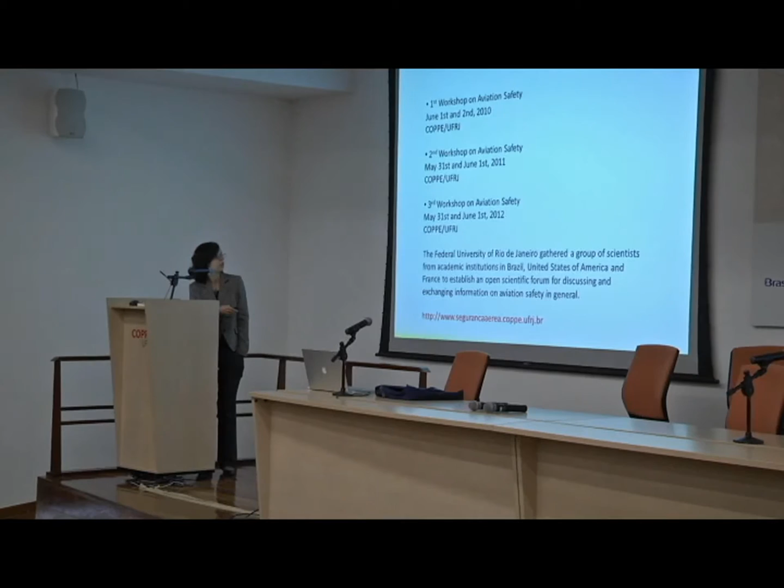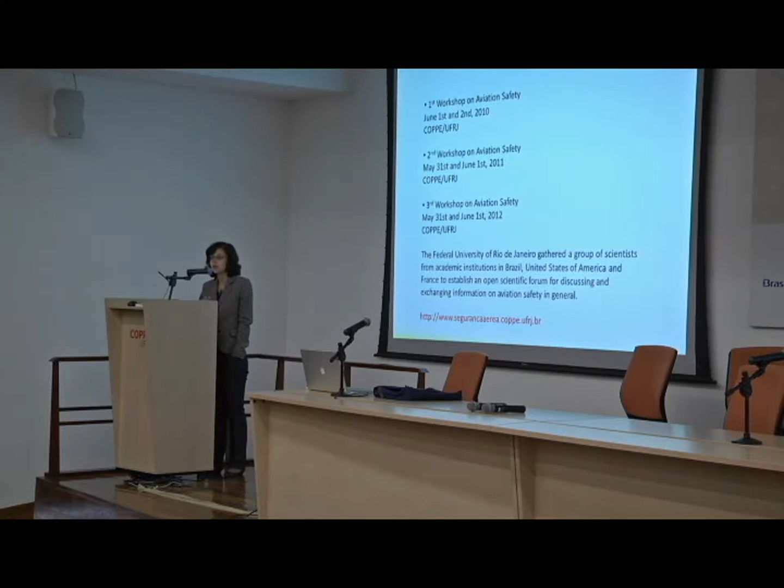To give a brief historical perspective, in the morning we mentioned the previous seminars regarding aviation safety. The idea of the wind tunnel was brought up between the first and second workshops of aviation safety, which came together through a group of scientists from Brazil, United States, and France. Professor Sheriff and Professor Bob were here at the first workshop, and the ideas that came up in those two events resulted in the wind tunnel.

So I was going to say, Bob, don't worry, your email account was not intercepted by the National Security Agency. This message came to me from Professor Attila, and I apologize for bringing up a personal email, but it's just to contextualize the idea of building an icing wind tunnel here at COPPE. This email was sent by Professor Bob to Renato, and here he mentions it would be a good idea to build an icing wind tunnel in Rio, allowing us to do serious research on icing problems related to the aeronautical industry.

Just to stress some points—Bob gave us all the clues. It was a good idea to build an icing wind tunnel.

An icing wind tunnel need not be big. Space is one of our crucial limitations—our current lab is almost full, and the next one will be full in some years too. So we didn't have too much space, but he explains that since the pitot tube is small, flow blockage is not a problem in a small wind tunnel. Since the pitot tube is small, the tunnel could be small too. The icing wind tunnel would be perfect for research on conventional pitot tubes, and also on new technologies or sensors for velocity measurements that are less prone to icing problems.

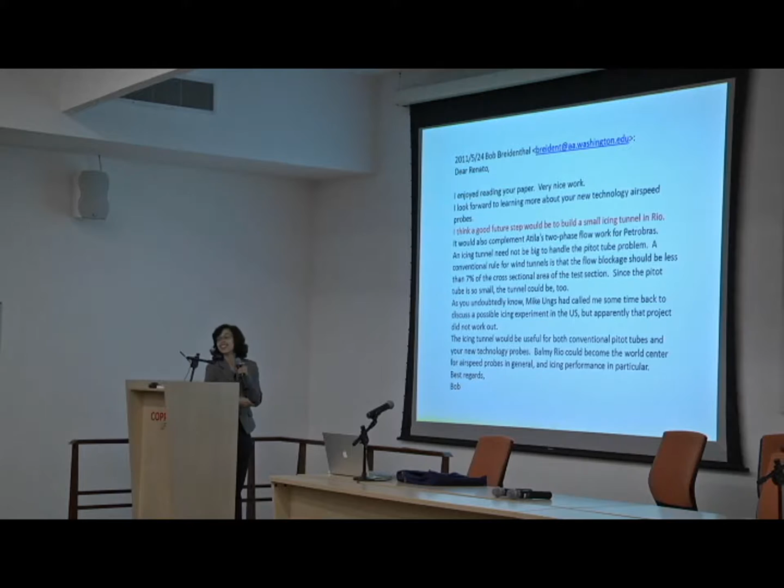So we got this idea, and Attila—who is also a crazy person and always says he has nothing to do—sent Bob's email to me saying, we are going to build a new wind tunnel.

So okay, we started planning that, and FAPERJ, our scientific foundation of Rio de Janeiro, opened a scientific call in September 2011. If you check, this email was sent in May, and by September we already had a sketch of the wind tunnel—a very basic sketch, but it resulted almost exactly in the real wind tunnel we have today.

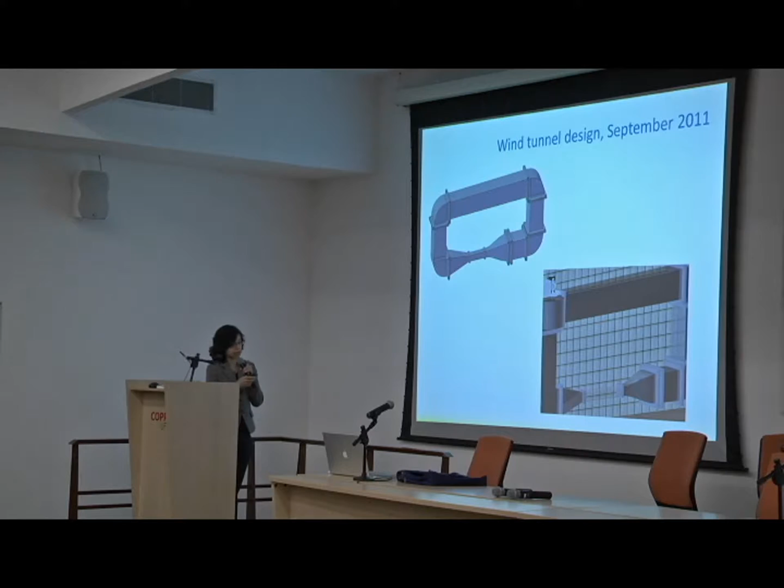I'll explain this in detail, but just to give an idea of the time schedule: we sent a proposal to FAPERJ in September 2011, and a place to receive the wind tunnel was selected in November 2011.

The building next door that you just visited looked like that in November 2011. The boats are still there, but now we also have the wind tunnel operating.

Then in August 2013, we had a big part of the wind tunnel already made, built with stainless steel tubes. We already had the test section in place, and here we can see the other wind tunnels over there, with the condensers and other components being installed.

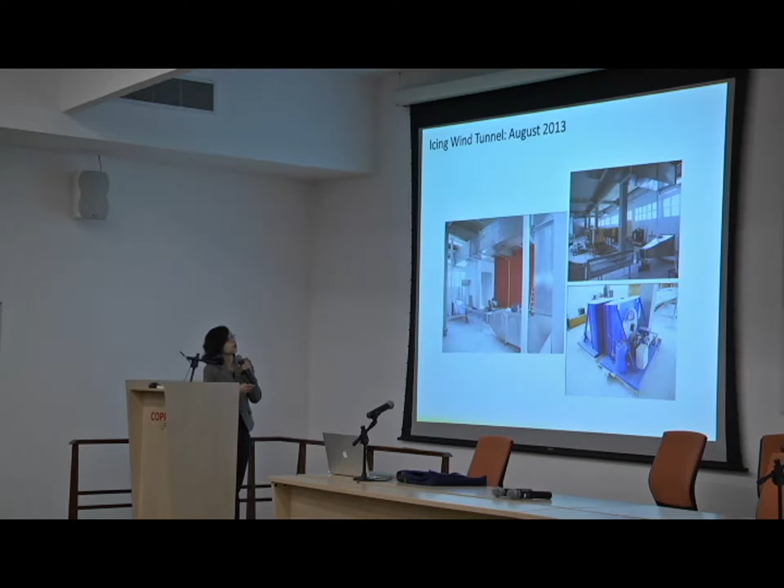Then in May 2014, in the beginning of this week, the place we just visited looked like that. We were crazy about the schedule because we wanted to make everything ready for this workshop—the date was very important for us, and everything needed to be ready in time.

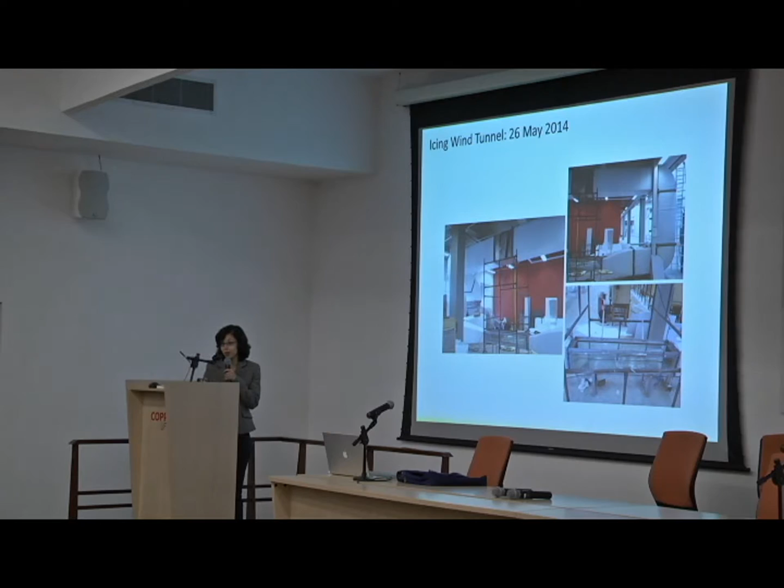This was real teamwork—when everybody involved wants to make it happen, we can make it happen. In two days' time, everything was working, and we managed to turn on the wind tunnel yesterday. As Professor Cota mentioned, Murphy's Law was not valid this time, and we could turn on the wind tunnel, the fan, the cooling system, and we even managed to generate ice in our wind tunnel.

We have the pitot tube installed over there, and this picture was taken at 8 p.m. when the experiments were done. Everything came together, and we were very happy because it all worked as we planned.

Coming back to the initial concept of the wind tunnel, since space was an issue, we planned to build a closed wind tunnel distributed vertically, with the fan located on the upper side. So we would let the flow develop.

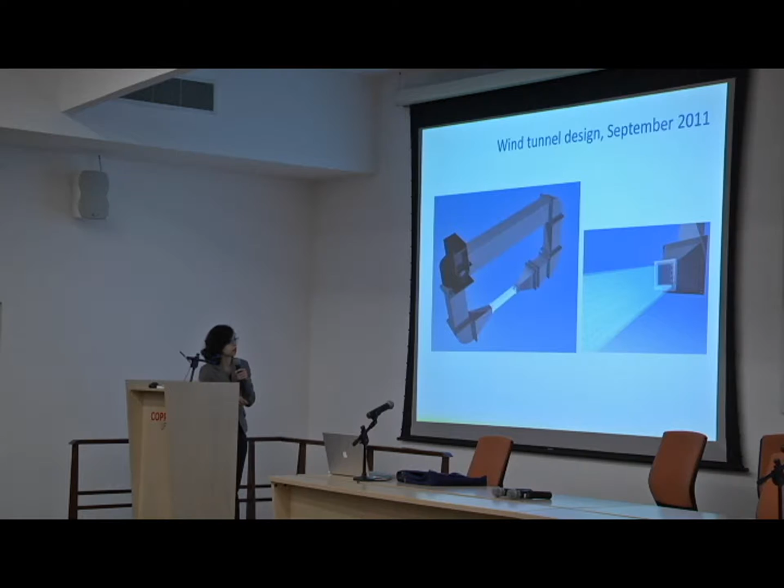Here would be placed the cooling system, and then we have directing vanes, the honeycomb, contraction, and the test section. Here we have the details: the fan, the heat exchanger, and the spray bars to generate the particles.

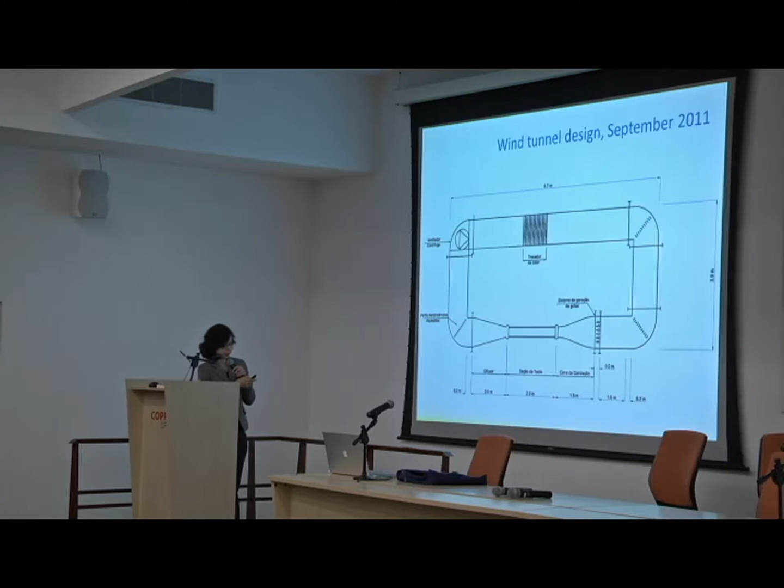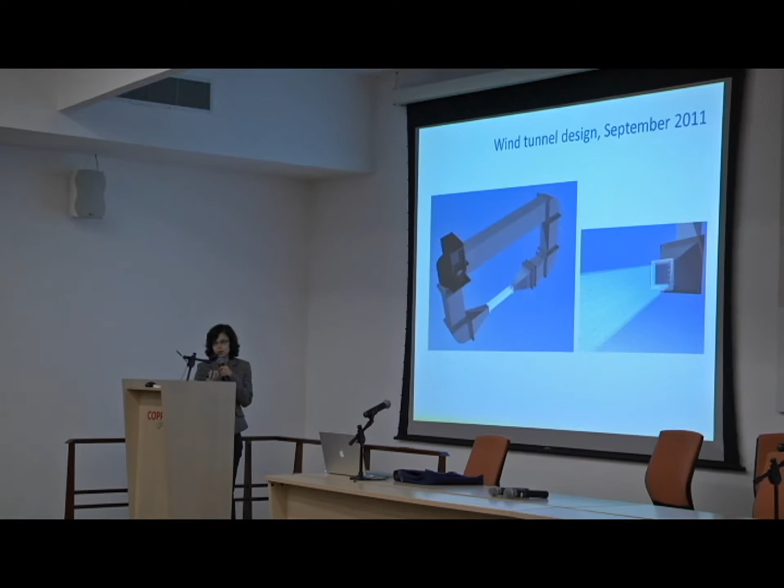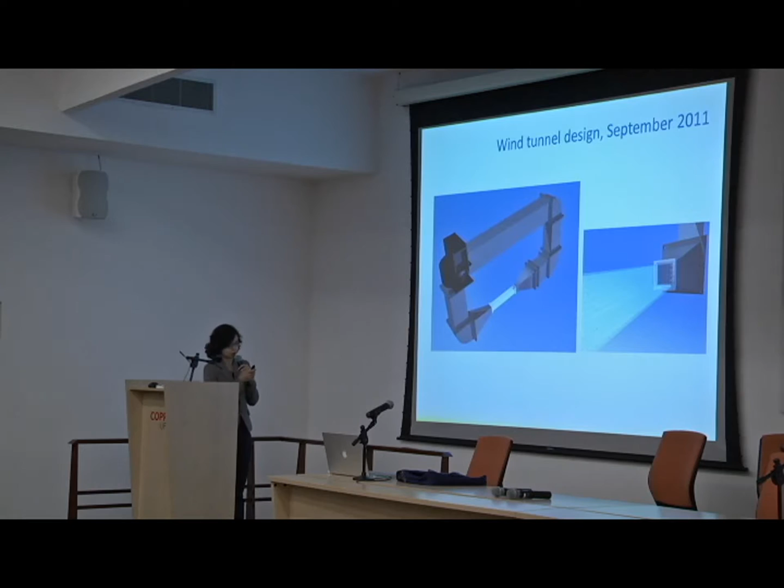This configuration had a small problem because of the fan. In this configuration, we had to let the axis be vertical, and this had some mechanical problems that the company that would provide us the fan would not like to resolve. So we simplified the problem and relocated the fan.

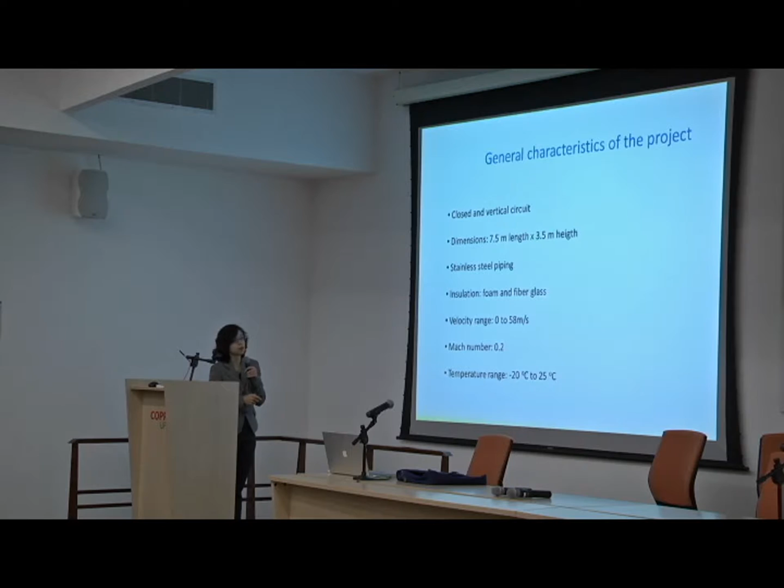I will show you how we got to the final version. Our basic idea was to build a closed and vertical wind tunnel. Since space was an issue again, we had that first figure I showed with the boat - that was the place we had to fit the wind tunnel. So it should have 7.5 meters in length and 3.5 meters in height.

It would be made of stainless steel to resist the water and the droplets we would insert, and we would like to reach 58 meters per second, or Mach about 0.2. I didn't put the Reynolds number.

I agree that Reynolds number is a critical number, but it's not a well-defined number here - we could define it based on the height of our sensor or on the diameter of our sensor, so that's why I didn't include it. In terms of temperature range, we would like to reach minus 20 degrees, and it will certainly go this far.

So in the final configuration, we managed to get it a bit larger, bigger in length than we first planned. The cross-section of the main wind tunnel is 0.8 by 0.8 - the bigger the section, the lower the drag we have, so the lower the pressure drop we impose on the fan. That's why we chose those numbers, which also allowed us to have a contraction ratio of 7:1. I'll show you later.

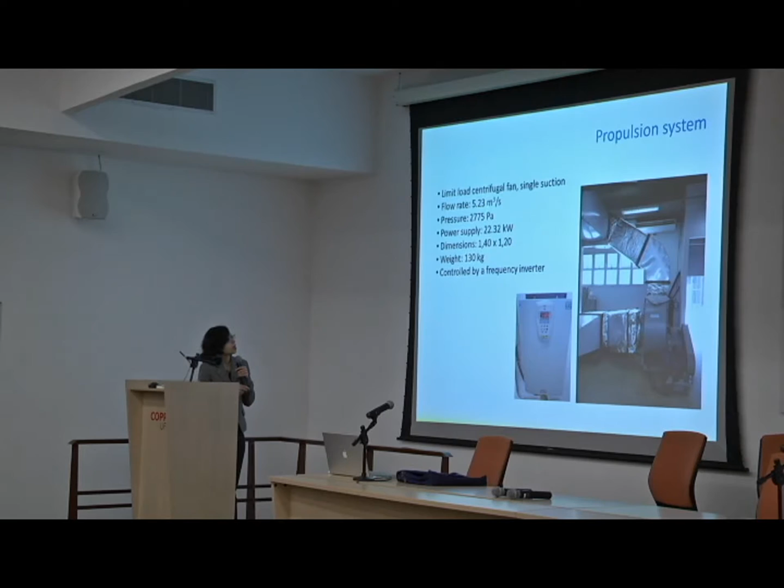So we specified a fan that could provide us Mach 0.2 - we actually went the other way around. We checked how much pressure the fan could provide, and then specified the honeycomb and quantified all the pressure drop in the system.

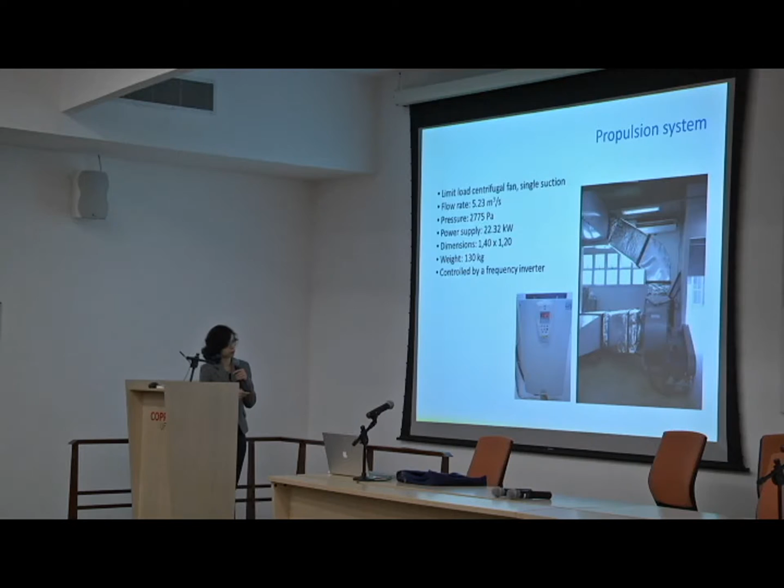José Roberto did all those calculations, and this is actually part of his PhD. So the fan has these dimensions, this weight, and this power in the end, and we can vary the velocity in the wind tunnel by a frequency inverter, changing the rotation of the fan.

So for the cooling and heating system, the idea was - we did all the calculations of how much heat we would have to extract from the flow and from the water droplets we insert in the wind tunnel. Summing up all the terms we had to exchange, we came up to this number.

So the evaporator unit has this capacity in order to provide minus 20 degrees Celsius for that test section. The working fluid is this refrigerant fluid, and the two condenser units are positioned on top of the lab.

And it was a huge operation to take the condenser units to the top, because they weigh a lot and have this power each. So we are operating now with just one, but they can be used in parallel, so they can both be turned on in order to provide a lower temperature on the test section.

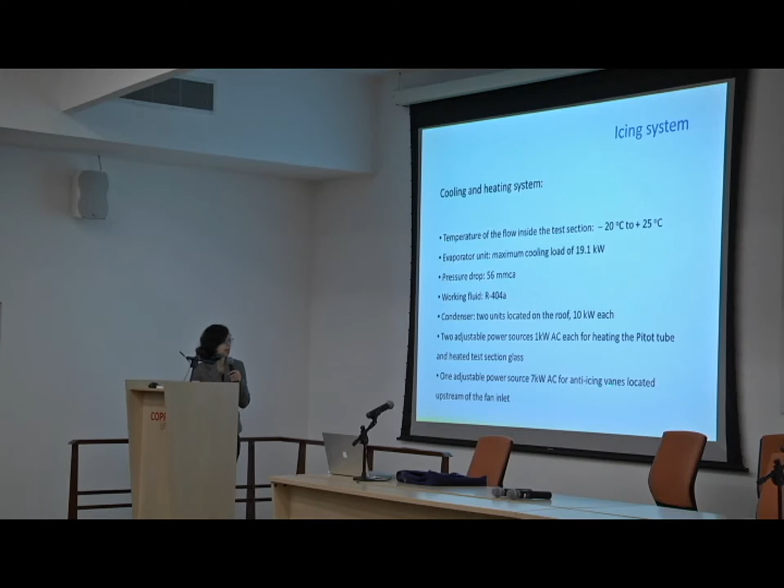We also have power to feed some electrical resistances that are heating the vanes that come directly downstream of the test section. So the idea is to liquefy all the supercooled droplets that go through the test section, in order to avoid water going through the fan.

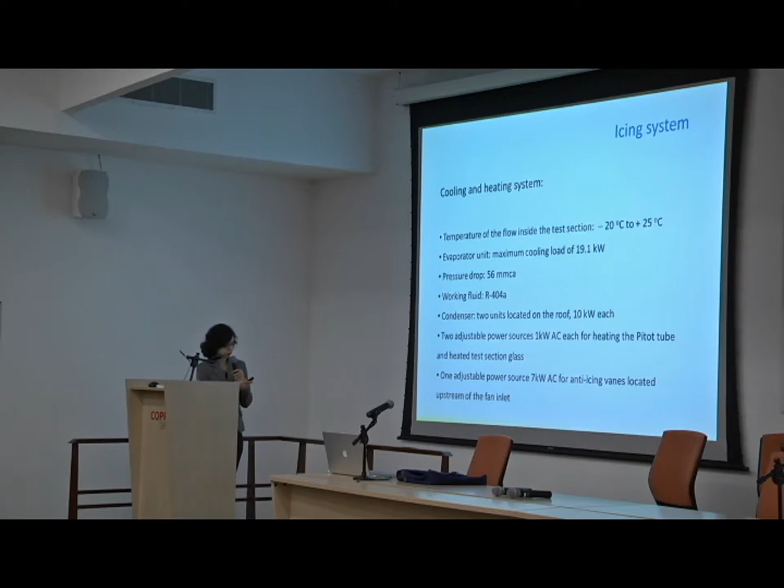So here is a picture of the evaporator being set up on the vertical section of the wind tunnel, the two condenser units that were positioned afterwards on the top of the lab, on the top of the building, and here the vanes being installed on the wind tunnel.

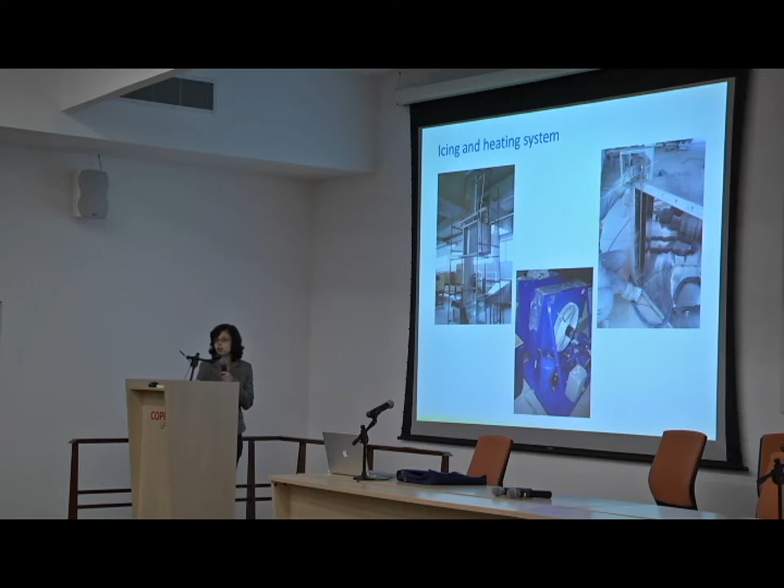Actually, these vanes were also dimensioned, and each of them follows a specific curve, dimensioned according to the recommendations in the literature. So here is a picture of the condenser on the top and the connections between them.

Our basic reference was the book of those two researchers, Wind Tunnel and Their Instrumentation, from the 60s, a classical book where we can find all the mathematical equations and modeling to predict the vanes, the screens, and the honeycomb, which are the main sections of the wind tunnel.

So the guiding vanes, their purpose - this is especially for students who are coming to know a new apparatus, and it's interesting to know how the parts that build the whole wind tunnel work. We call those elements the flow conditioning elements, in order to have a high quality flow in the test section. So the purpose of the guiding vanes is to straighten and smooth the flow downstream of the corner.

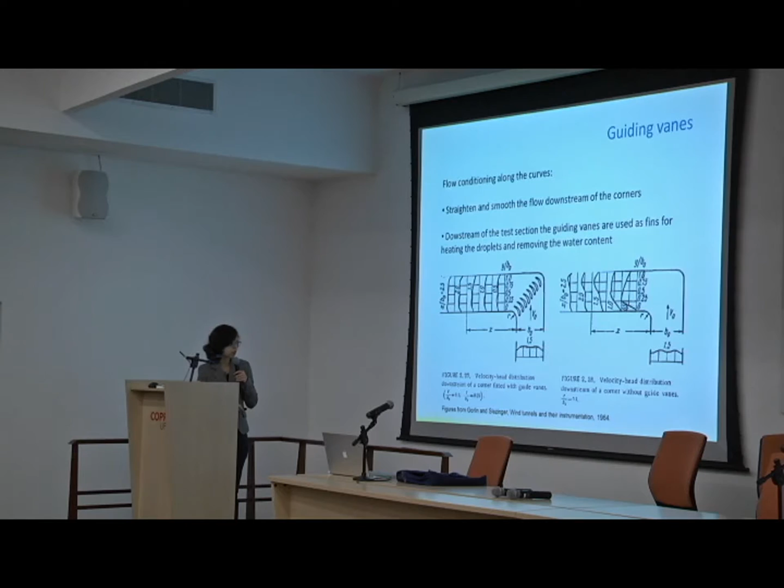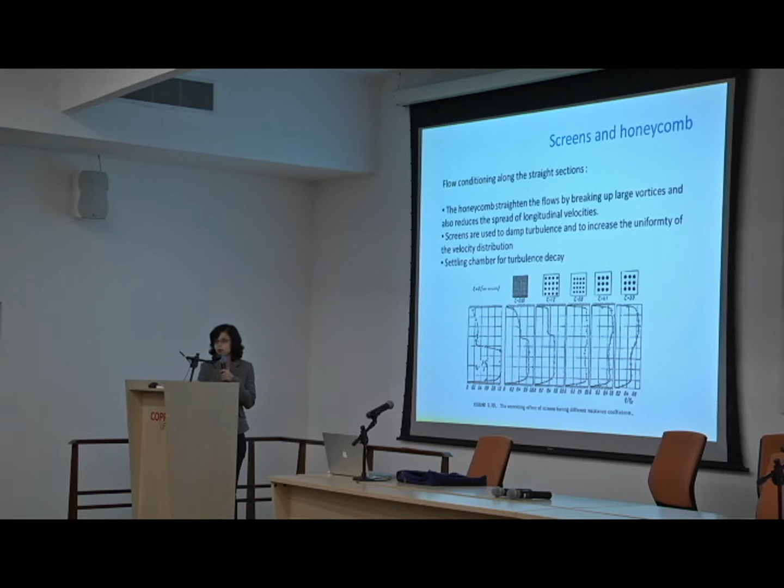This was dimensioned - our screen and our guiding vanes were dimensioned according to the recommendations given in this book. And actually all the pictures I have illustrated here come from that reference, okay? So the idea is to have a uniform mean flow and a controlled level of turbulence in our test section.

So the last conditioning element is the nozzle, or the contraction. The contraction actually controls the level of turbulence in the test section. The higher the contraction ratio, the smaller the turbulence in the test section. It's like a rule of thumb.

And here we have a contraction of 7, so this is a good number. Indeed, a number higher than 5 is very good. So we have a profile designed like a 3-degree polynomial. Its total length is about 1.5 meters. And this is actually the curve that gave origin to the contraction we have there today.

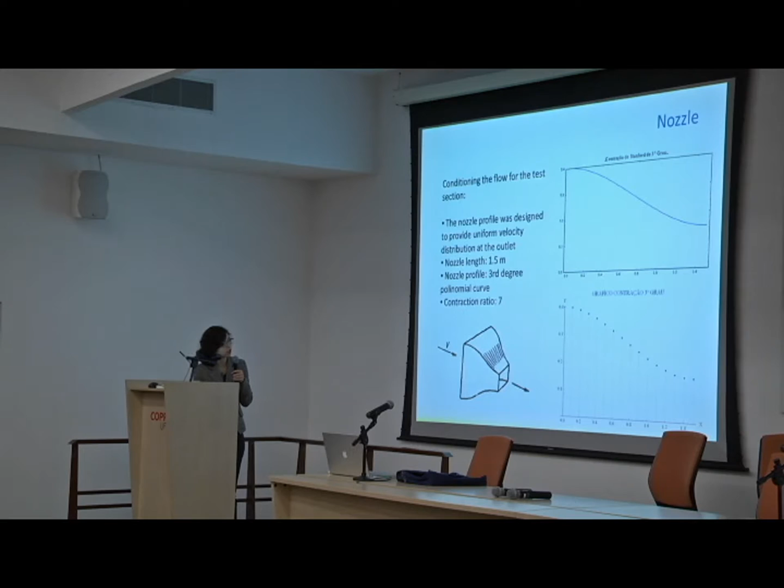And the spray bar system is actually one of the main parts of the wind tunnel.

This is being installed. Actually, this is the sole part of the wind tunnel which is not fully operational right now. The idea is that small droplets must be inserted very carefully in order to simulate the conditions of the atmosphere, of the clouds that are prone to generate icing conditions on airplanes.

So here we have just a very basic sketch to illustrate that we are going to insert our nozzles in an airfoil shape in order to minimize perturbations on the flow. Those nozzles will be distributed along the cross-section of the wind tunnel to provide a uniform particle distribution on the test section. Here we have the place where the nozzles will be inserted, just prior to the contraction, in order to get a uniform cloud or dispersion of droplets on the test section.

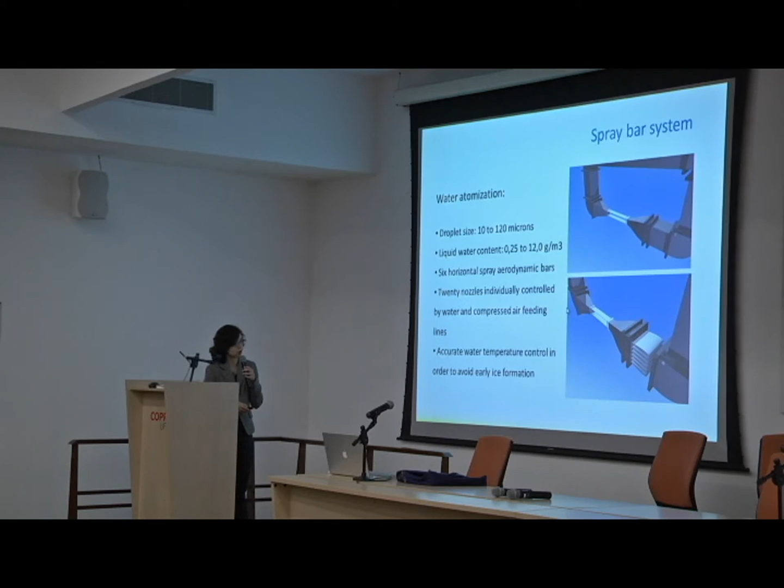Temperature control is very important to avoid early ice formation. In most experiments, we want the droplets to remain in the liquid phase reaching the model and just turn into ice on the model surface. This needs high temperature control of both the wind tunnel and the water droplets inserted on the spray bar systems, inserted in this place.

The test section has 300 millimeters in both height and width, and 2 meters in length. This allows us to study pitot tube geometry, but also airfoils and different aeronautical structures. As I mentioned, we are managing to reach negative temperatures already.

I made a zoom of our temperature monitor here. This is the temperature inside the test section being monitored by a thermocouple. The test section, as you just saw, is fully instrumented. We have an infrared camera here, the pitot tube installed on the test section, the LDA, and also the laser for the PIV.

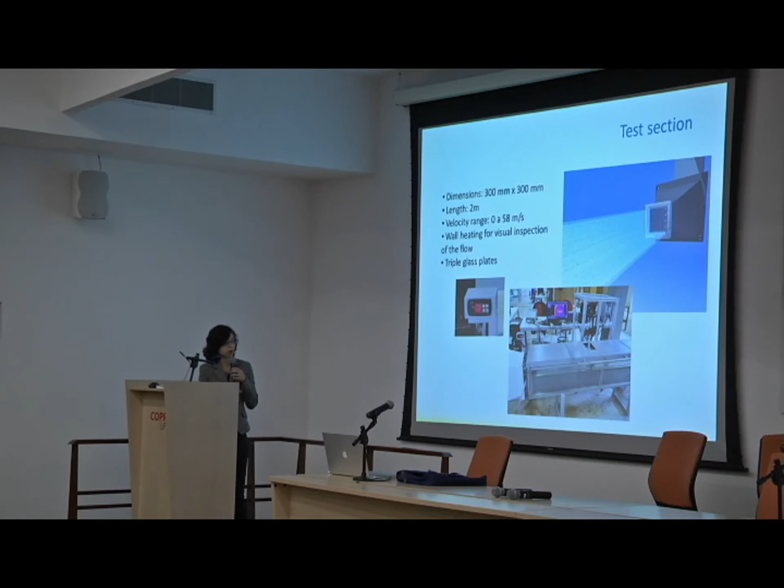This is just a picture from the construction work, but here we can see how we can reach the inner part of the test section. We opened the top side of the wind tunnel in order to introduce the models into the inner part of the test section.

Since we want to use optical techniques to quantify the velocity profile and also the particle size of the droplets, we need the test section to be transparent. We also must be careful with condensation of humidity on the side walls. So the idea was to introduce some electrical resistances. We have distributed resistances and glass walls, like a sandwich of 3 layers of glass with a hollow space in the middle.

This is a zoom of the electrical resistance placed on the face of the glass. These are already working. We have to check if those are actually enough to prevent humidity condensation, so that we can use LDA and PIV for velocity measurements. This will certainly be an issue.

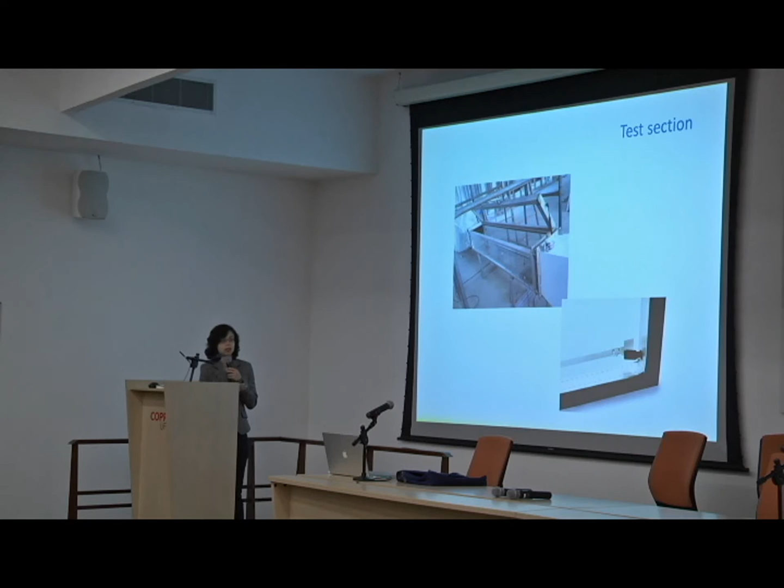The diffuser - I'm just tracing the flow direction. We move it from the fan to the condenser, then to the honeycomb, to the screens, to the test section, and now we are going to see the diffuser. The diffuser is the element that connects the test section to the cross section that will eventually reach the fan.

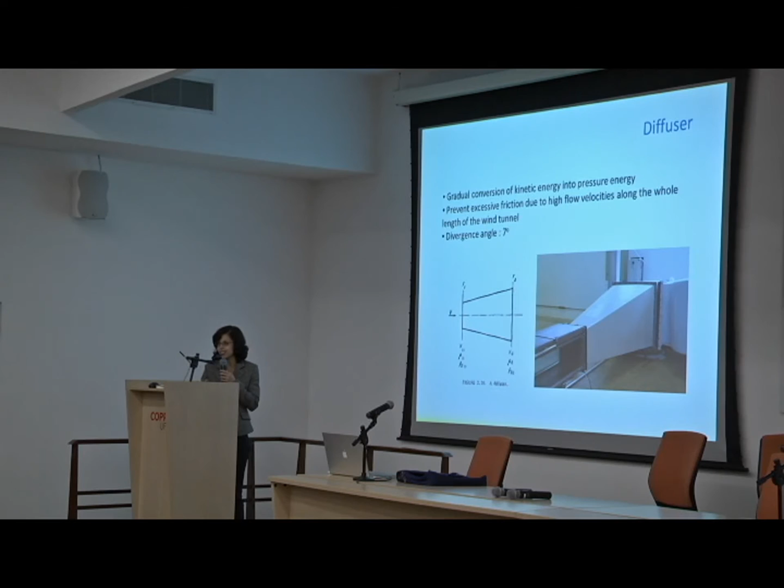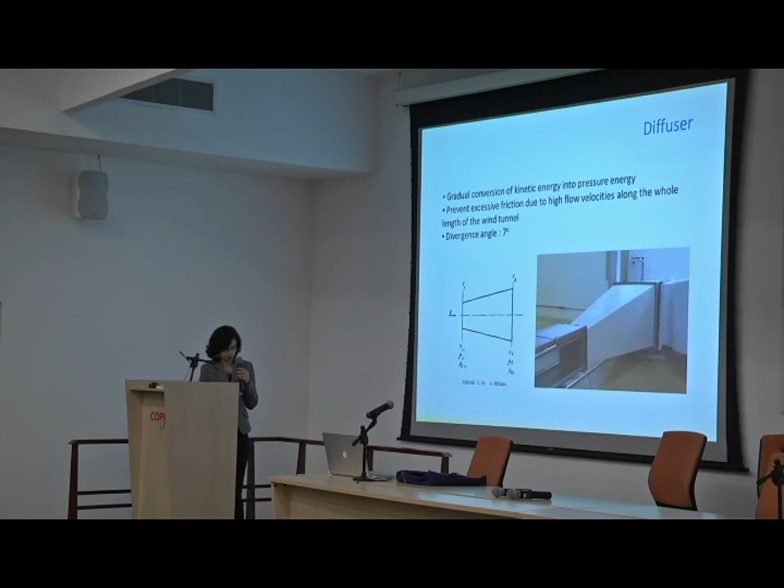Bob also mentioned he was aware that we should not put a high angle in the diffuser in order to avoid separation. This diffuser has an angle of 7 degrees, so we are just about the limit of having considerable separation. But we are going to check if separation is an issue here, and if it is, we can use vortex generators to avoid losing energy with a separation region. This was dimensioned according to the literature again.

What's the instrumentation we are intending to use? As I just mentioned, we are mainly relying on laser techniques. This is the ideal instrumentation for a wind tunnel because it's non-intrusive and we can measure velocity profile with high temporal and spatial resolution. We have all those instruments fully operational in the lab: LDA systems, PIV systems, hot wire systems, scientific pitot tubes.

We are here measuring from 1 micron to 4 micron distribution. The PDA can also reach about 1 millimeter, 1.5. So this instrument is actually very reliable, and it covers all the range of size distributions we need to quantify for the pitot tube case.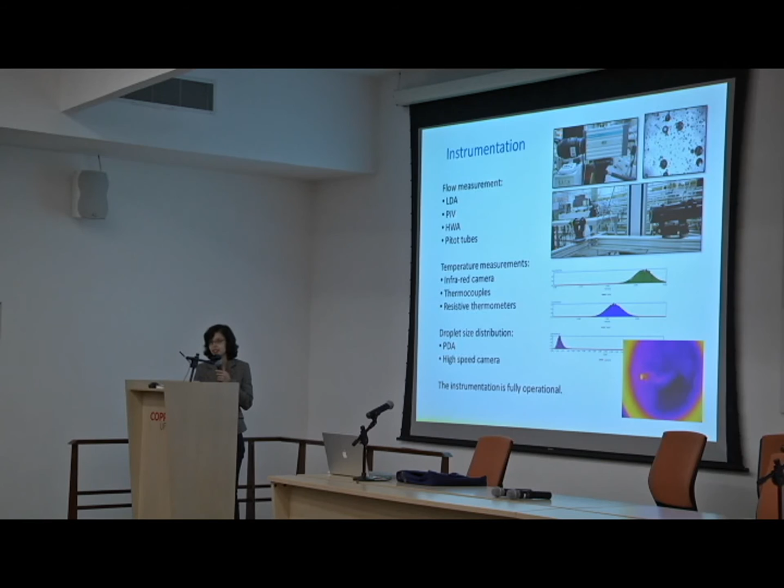So the wind tunnel capabilities—what we can do right now, and Zé Roberto is going to start doing in his PhD thesis next Monday—we are now able to reproduce extreme weather conditions under controlled laboratory experiments. We have seen all the open questions and demand we still have for understanding how icing on aeronautical structures occurs. So having the wind tunnel fully operational, we have the ability to contribute on this issue.

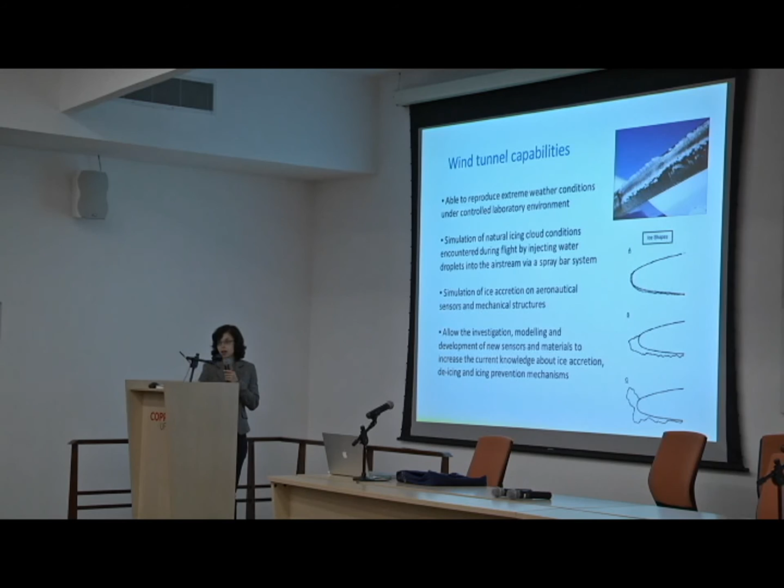And also test anti-icing and de-icing mechanisms or techniques. So we can contribute in different areas related to the subject, and our idea is to contribute actually in each of those areas.

We are already working on surface deposition films, which can be hydrophobic and avoid the deposition of water droplets on the surface. We are also working on developing new sensors based on optics, for example, that are not so prone to icing restrictions like the pitot tube.

The wind tunnel will also be extremely important to generate an experimental database for validation of mechanical models and numerical codes. Our group—Renato and José Roberto—has also developed some mathematical modeling of the problem that needs to be validated against reliable results.

The importance of doing our own experiments is that we have conditions to quantify all the variables we need. Anyone who has already needed experimental data from other researchers knows how difficult it is to gather all the variables we need to validate our models. So this is the importance of having everything done.

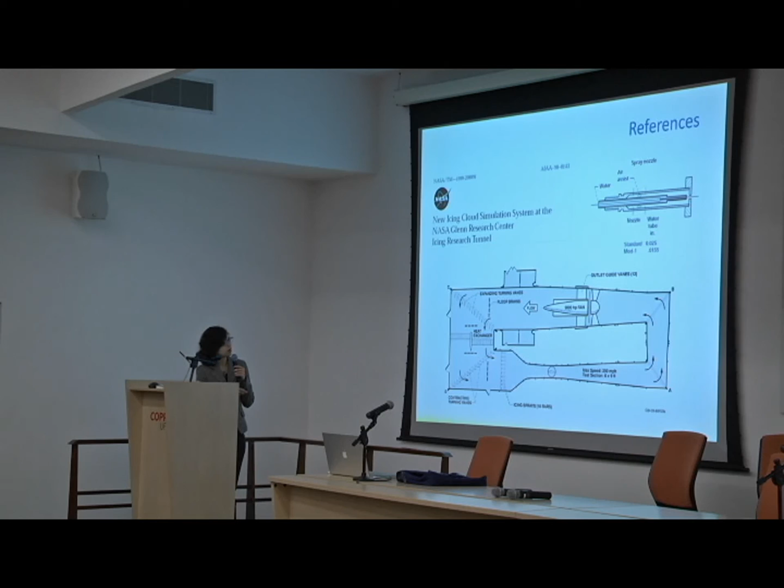So here are some references. Obviously, NASA Glenn Research Center is one of the main references. Here is a sketch of the inner parts of the nozzle of the spray bar system that we intend to reproduce something similar to.

And just to conclude the presentation, as was mentioned in the beginning of the seminar, this is the first wind tunnel of the southern hemisphere, as far as we know. So this is not a small thing, and we have to learn to value the results we get.

So this is one of the ideologies of this graduate school: do much work with—think big and act small. So thinking big and acting bit by bit, we can reach the result.

And having a good team, involved with the purpose and working together, we can do very big things. And this is one of the big things we can be proud that we reached, with our team.